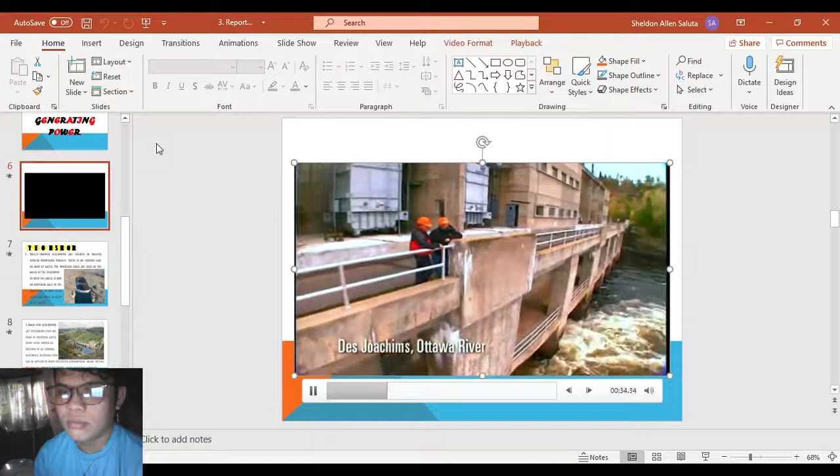170,000 cubic meters of water flow past here every minute at almost 60 kilometers per hour. That's enough water to fill about 100,000 Olympic swimming pools every day. Standing here, you can actually feel the power of the water. Harnessing that power is what hydroelectric stations have been designed to do for over 100 years in Ontario. In essence, they are factories that convert the energy of falling water into the flow of electrons, or what is commonly called electricity, the electricity that powers the province.

Most hydroelectric stations use either water diverted around the natural drop of a river, such as a waterfall or rapids, or a dam is built across a river to raise the water level and provide the drop needed to create a driving force.

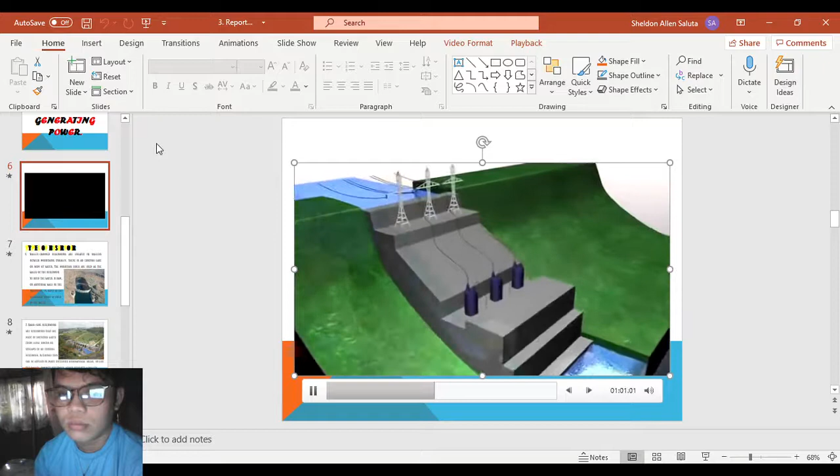Water at the higher level is collected in the forebay. It flows through the plant intake into a pipe called a penstock, which carries it down to a turbine water wheel at the lower water level. The water pressure increases as it flows down the penstock. It is this pressure and flow that drives the turbine that is connected to the generator.

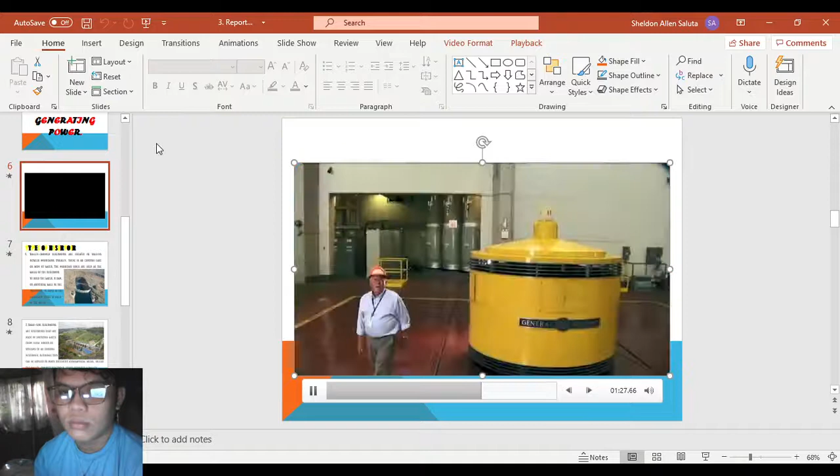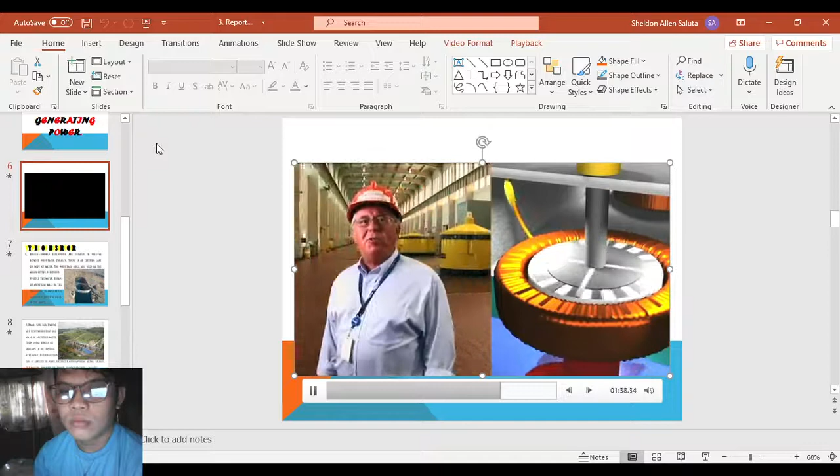Inside the generator is the rotor that is spun by the turbine. Large electromagnets are attached to the rotor located within coils of copper wire called the stator. As the generator rotor spins the magnets, a flow of electrons is created in the coils of the stator. This produces electricity that can be stepped up in voltage through the station transformers and sent across transmission lines.

The falling water, having served its purpose, exits the generating station to the tail race, where it rejoins the main stream of the river to continue the cycle of creating clean, renewable energy for Ontario.

Okay, we have three types of reservoirs. First, valley dam reservoirs are created in valleys between mountains, usually where an existing lake or body of water is present. The mountain sides act as the walls of the reservoir to hold the water, and a dam or artificial wall is built at the narrowest point to hold it in.

Second, we have bankside reservoirs, made by diverting water from local rivers or streams to an existing reservoir. This can be applied to many geographical areas, but unlike valley dam reservoirs, which require a valley, diverting water from a river can create problems. The River Thames in London is one example of a bankside reservoir.

The last type is the service reservoir, which is very common and usually found in the countryside. These are entirely man-made, usually stored in concrete basins above or below ground. You might be familiar with the large water towers in the countryside - this water tower is a service reservoir.

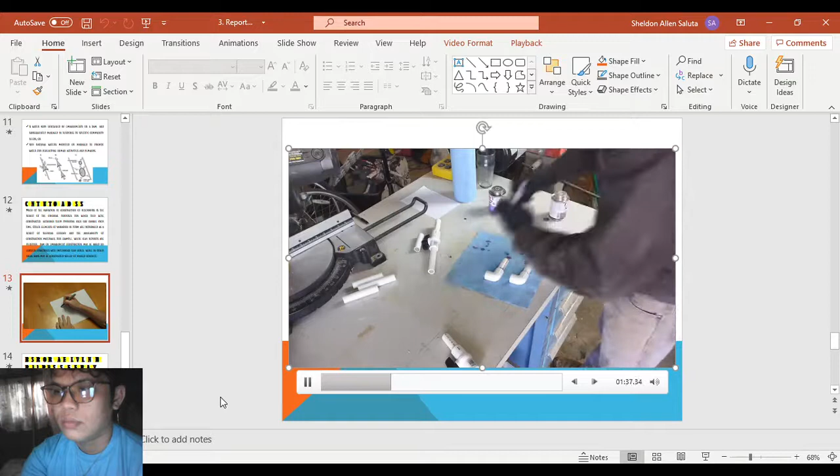Then I coated all of the surfaces which would be getting wet with marine grade epoxy. The goal here is to prevent leaks and keep the wood from becoming saturated, which might cause it to swell or mold or just be too weak. I've never built a wooden boat before, but I think this is how they do it. The epoxy built up a nice thick film and filled in any cracks and holes, so I'm feeling confident that this thing will be able to hold water.

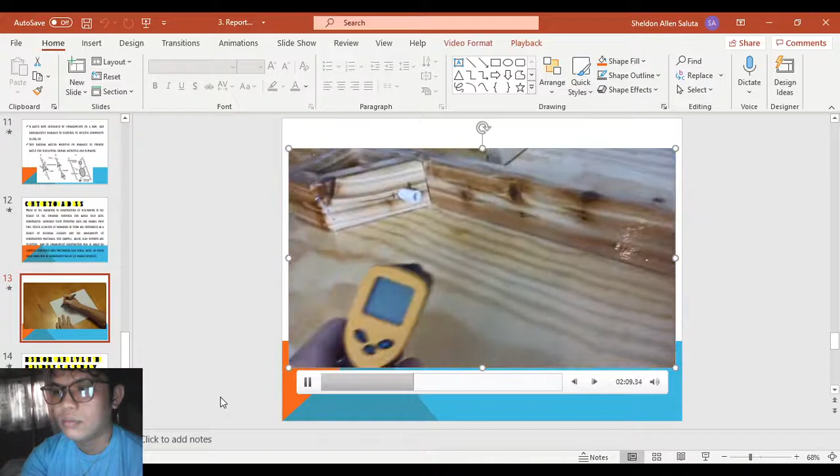I'm checking the temperature on the epoxy too, just to make sure that we're within the recommended range since it's still a bit chilly outside.

While the epoxy was drying, I built the legs which will hold up the display. These are removable so that the display will still fit in my car.

After the epoxy was cured, everything got a coat of exterior latex primer. I figure if this paint can stand being in the weather and the sun for several years, it can probably stand to sit underwater once or twice a year for a few hours.

I got these little sample sizes of colored latex paint. I had no idea you could do this, but these are really cheap, like a few bucks. And the big box stores will mix it to whatever color you want, and it's really high quality paint. For the PVC pipes, I use spray paint designed for plastic.

So I did a lot of masking and a lot of painting to make it look nice. And then I used a projector to get the lettering on the display and then just Sharpies to fill it in.

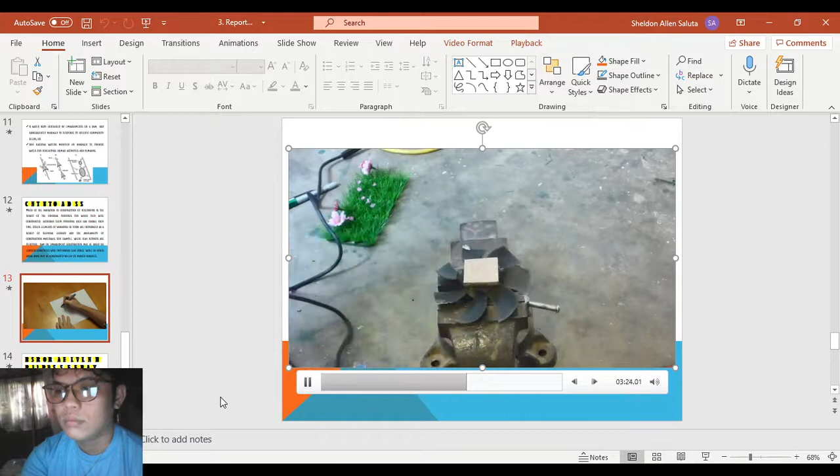For a few finishing touches, I painted this computer fan green to use as a hydropower turbine, and I put this fake grass to use as a lawn.

The last step was just to add a nice bead of silicone caulk all the way around the edges and install the acrylic sheets. I pre-drilled all the holes, and I used Kreg pocket screws to hold the acrylic down because they have a nice flat washer head that distributes pressure evenly and will hopefully keep from cracking the acrylic. And I set my drill clutch to the lowest setting to make sure I didn't over-tighten anything.

This is my favorite part.

So here's how the display works. Water is pumped from a tray behind the display to above the lake to simulate rain filling the reservoir. A flood can be simulated by pouring in a pitcher of water.

I built a small crest gate to act as a flood control structure. It doesn't seal very well, but it gets the point across. There are houses along the bank of the river downstream to show how flooding can affect structures near rivers, and it's easy to see that a house built at a higher elevation has a lower chance of flooding.

Hydropower is simulated with the computer fan, and water supply is represented by this garden hose and bathroom sink. And low flow releases can be made from the dam to keep water in the river downstream. And there are some fishes here to show why environmental flows are important.